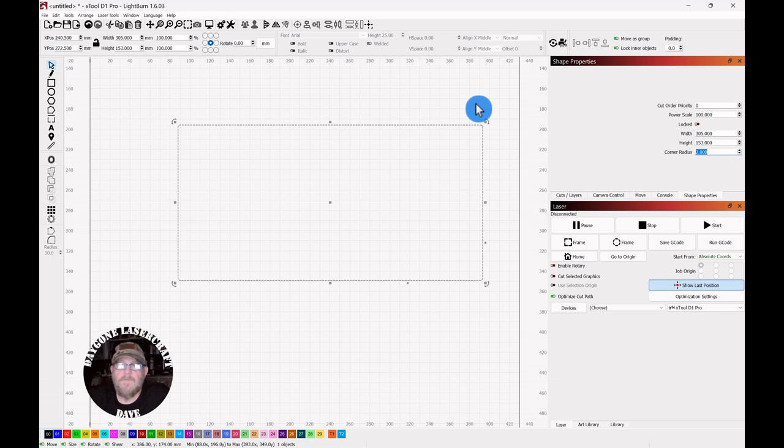So you want to select it, go over to the shape properties tab, and just radius the corners off. 2 should be fine, just keep them from being sharp because this will kind of stick out on the bottom a little bit. If you don't have that shape properties tab, you can go up to window, down to shape properties, and make sure it's selected.

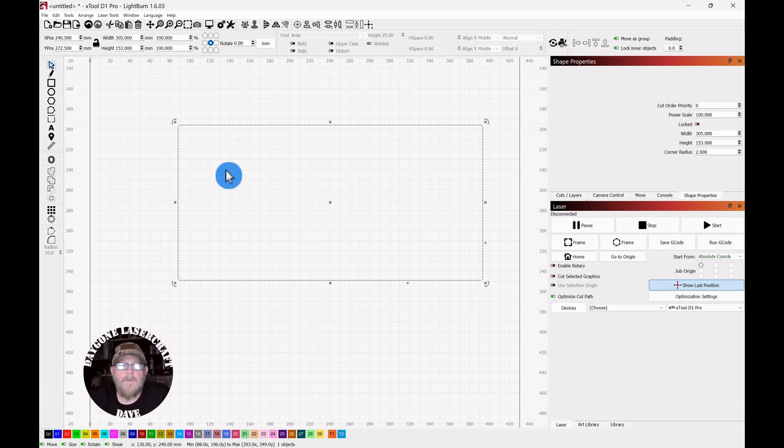So select your rectangle, and then we want to go over to the offset tool, and we're going to offset this inward, bevel, and 2. That's going to allow us to set up a tool so we can line up our slots.

So remember, you can use your mouse wheel to move in and out, and you can hold it down and move your entire canvas around. I do that a lot so I can try to keep the work out from behind my face.

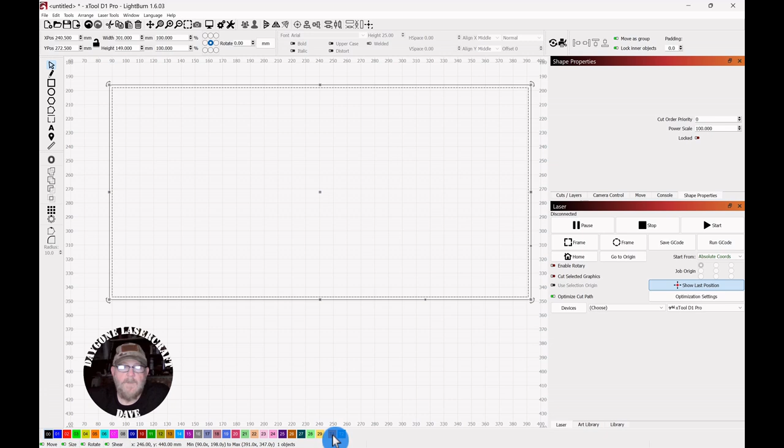So you want to scroll in, and you want to select that inner offset, and then go down to the bottom and turn that into a tool. Now don't group these together.

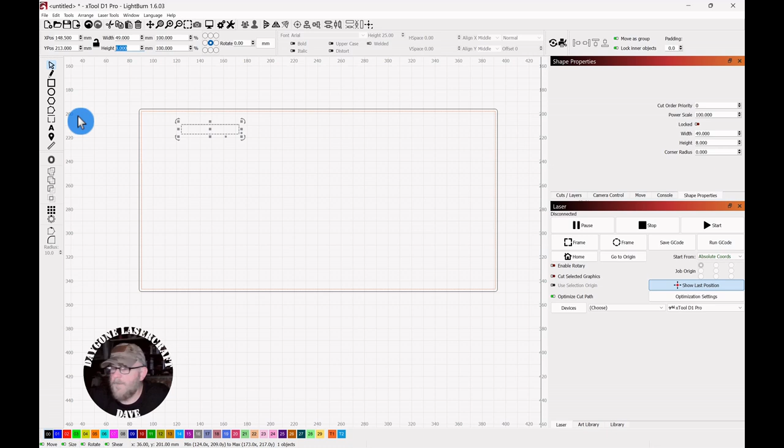And then we can grab a square, just drag out a rectangle and drop it, turn it into a cut, and we're going to set up our slots. So we're using 5mm Luan plywood, and to adjust for kerf a little bit, we'll make this height 4.8. And then the length, we just make that 50.

That should work fine. Then you want to select it, Control D to duplicate, and just pull one out of the way. It's always a good idea when you make little things to just hold one aside, so you don't have to do it again. I usually forget - if you look back at my other videos, I'll forget and have to go back and do it anyway. Okay, so we're just going to grab the edge.

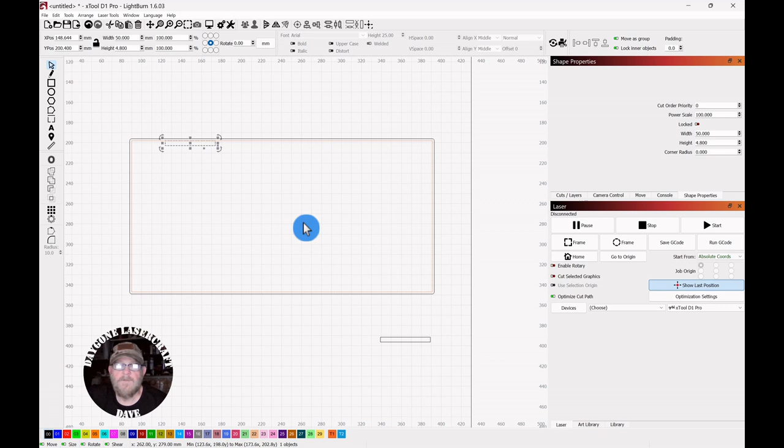We're going to grab the edge of this. And I believe with version 1.6 of LightBurn, if you hold Alt, it makes the snap a little stickier, so it'll snap from further away, which is a good thing. We're not measuring here, we just want 2 tabs in the front and the back, and we're going to put 1 on each side and 1 in the center for a divider.

So with that in place, Control D and pull it out. And then you can get back in, hold Alt, grab the edge of it, and then snap that to the tool. And then we want to select both of these.

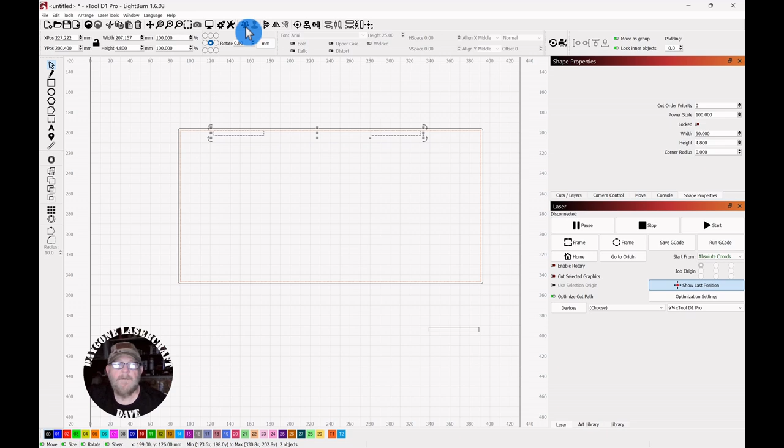And group them together. You can use group up top, or you can right click and you'll find group in this set of tools here. But with it selected, then you want to push Shift and select your base, and then go to the vertical alignment tools and click center, and it'll move those over where you need them.

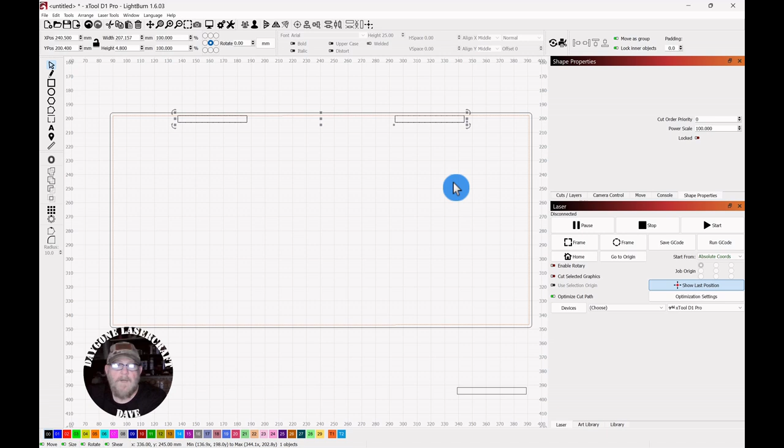Then we can select them, Control D again, use the down arrow to pull that out and take it to the bottom. And once it gets to the bottom, chances are you'll have to snap it back in place anyway - it'd be too good to be true for it just to snap where it's supposed to. But you can hold Alt and just pull it right back up where it needs to be.

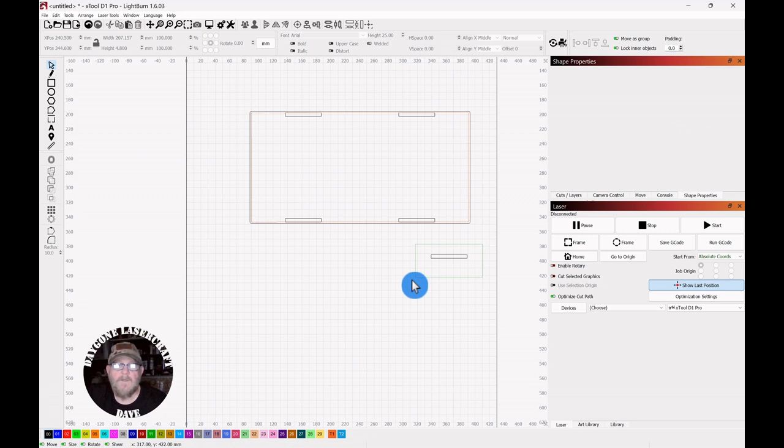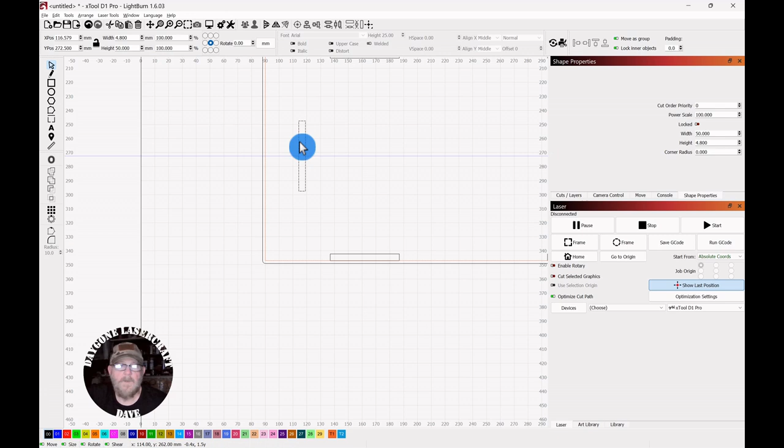All right, so now we'll get one of these. Control D, pull it out. And we're going to use the comma key to rotate counterclockwise, and we'll pull that up. Then you can pull it in and then center, or you can hold the Alt key and it'll give you a center. And as long as that line stays there, you're good to go.

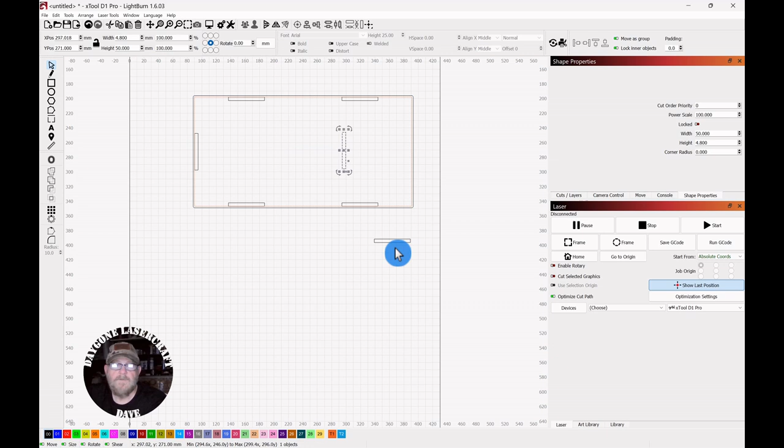Control D to pull out another one, because we need one for the center and then we need one for this end. So we'll go ahead and take this to the end, but you can use those arrow keys to move items around.

I'll try to keep this end close enough. Get on the edge, hold Alt. When you can get on the edge, just snap it right to the tool. I did not make it all the way, I make a lot of mistakes folks, but y'all hang with me, we will get this done. You can wiggle this around to make sure it gets to the center.

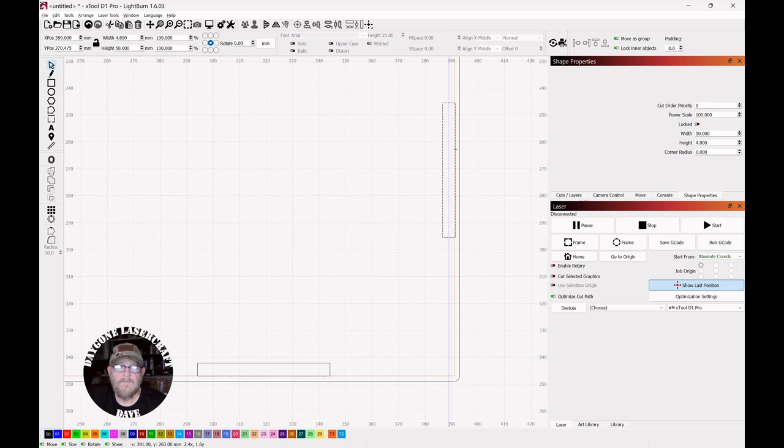Like that, that line popping up, dang, right there. And if it gets too irritating, just put it where you think you want it, then hold Shift, select, go to horizontal alignment, and click center, and it'll move it to where it needs to be.

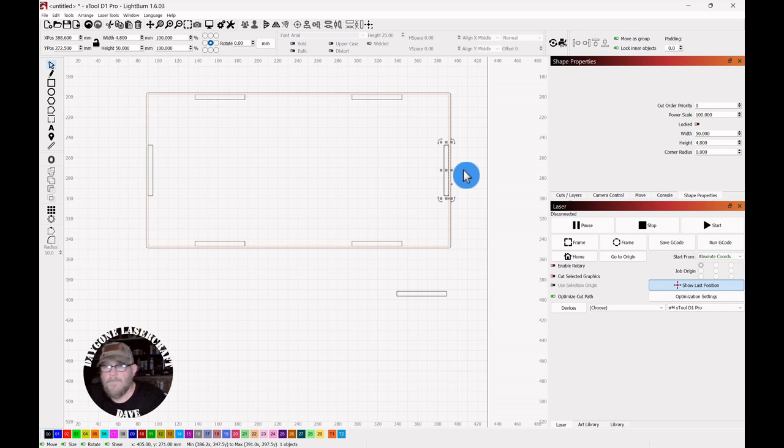Okay, so now we need one for the center. So Control D, we'll move it back out, and to save us some time, we'll go ahead and use Shift, select, and hit the bullseye, and put it right where it needs to be. Save ourselves some headaches.

Okay, so now we want to go ahead and lay out the back piece first. To get the width of the back piece, let me get in closer. It's this back line, this tool line is what we want, and then our end pieces will sit inside. We're not worried about it being real tight because we're not purposely putting tabs in the front or back, because we didn't want them to show. That's why they're on the bottom. The front will look smooth when we finish this off.

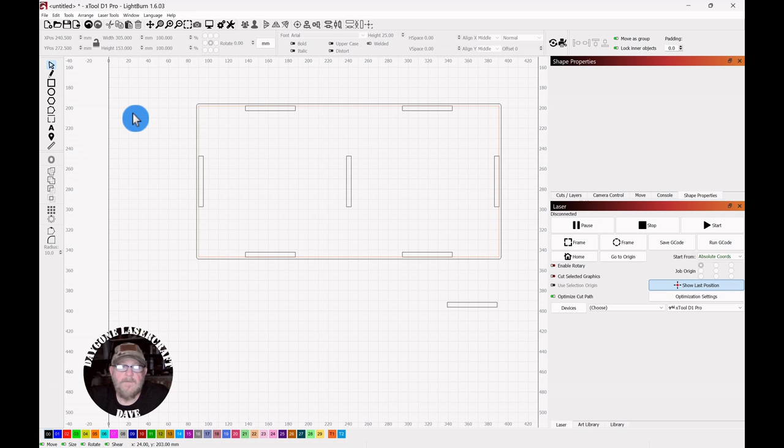So to get that length, you can click your ruler and you'll get this pop-up. With this line, you just scroll your mouse over the area that you want to know, and it'll give you the distance, which is 300.9 millimeters. So that is the width we need.

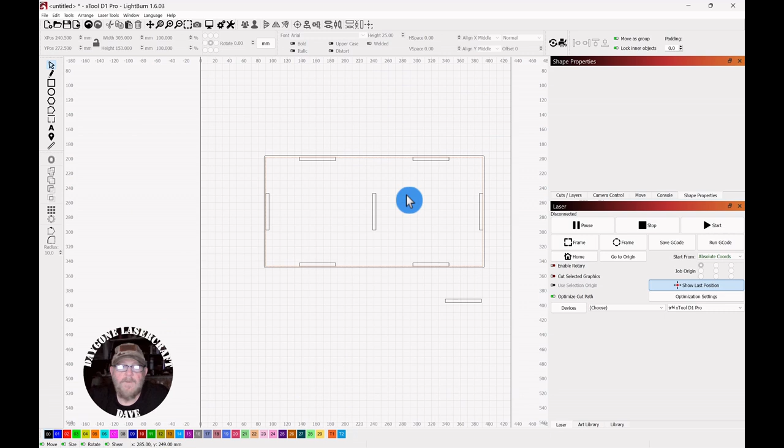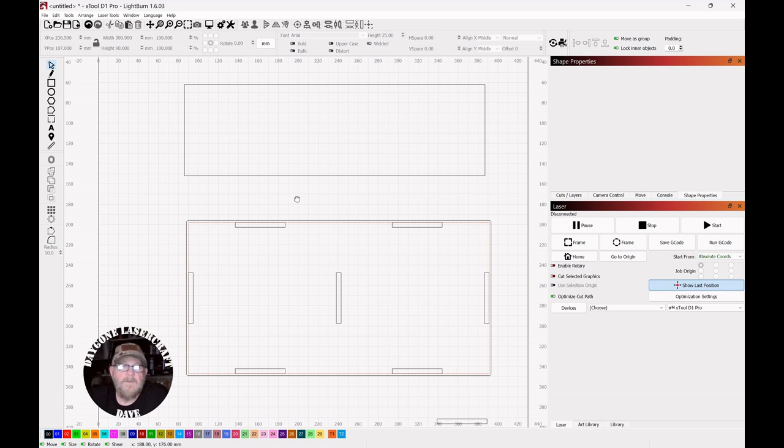So we can grab a square, just drag out a rectangle and drop it. Click your selector tool, go to width, and set it to 300.9. And that's what we got. To check it, we can select it and just bring it down and see if that is right, and it is.

Okay, so now for the height, yeah, I guess it just magically went to 90, but 90 is what we need because that's about 3.5 inches.

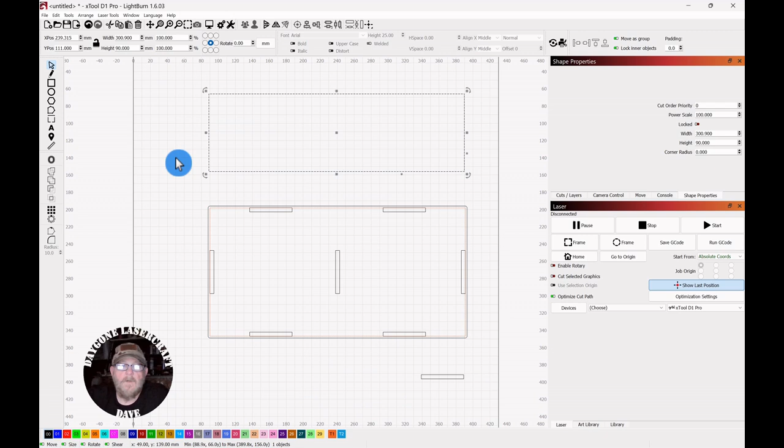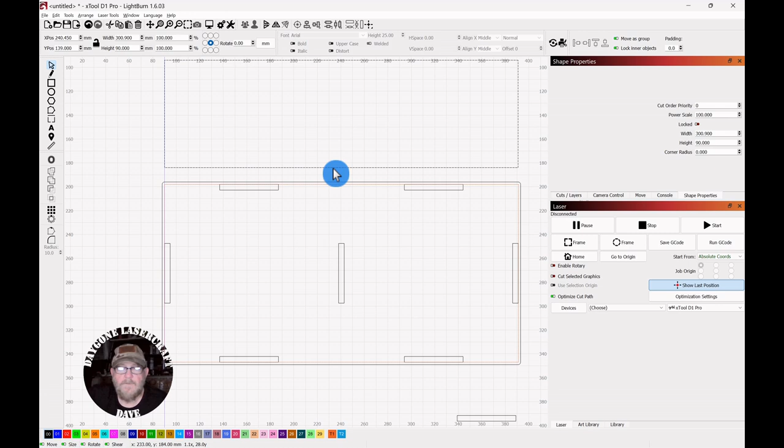So now what we're going to do is line this up with the Alt key, and then we're going to set those tabs where they need to be. Make sure you line up with that inner piece, you can see those lines there. And then release, and then you can select these.

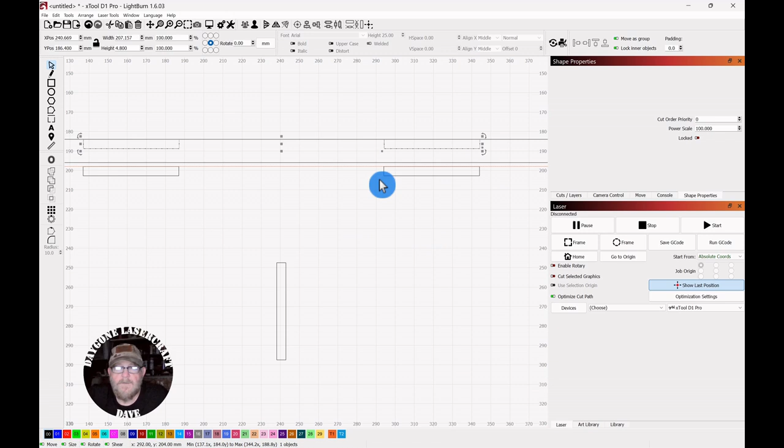So don't group any of this together at this point. Then you can Control D, use the up arrow, and then you can pull those out. You'll have to grab them and get on the edge and snap it to the edge, but that's okay. The main thing is you want to be lined up with these slots here, and I believe we are.

So you can just select everything, and then you can pull it back down and make sure that it's lined up, and they are.

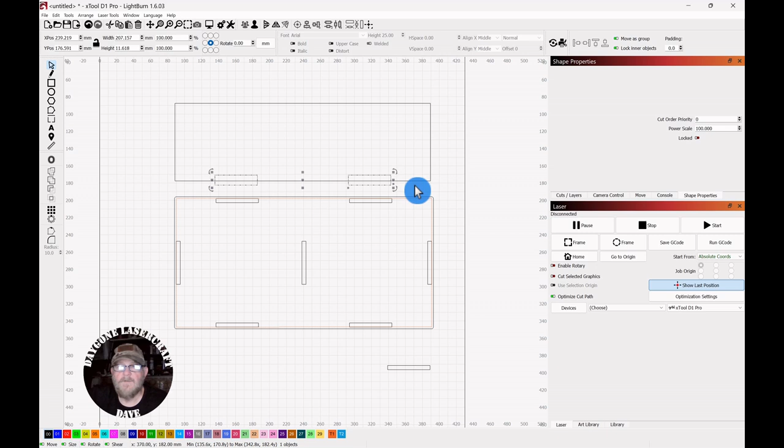And then you can select them, select those two, and just pull them up inside a little bit. That way you can be sure that they're going to weld, because sometimes you'll weld if it's not snapped good. You'll weld, but it'll leave a crack, and you don't want that to happen.

All right, so we're going to select all of this together. We're going to go to the modifier tools and click weld. And there we go, so that will be the back. Let me move this tab out of the way.

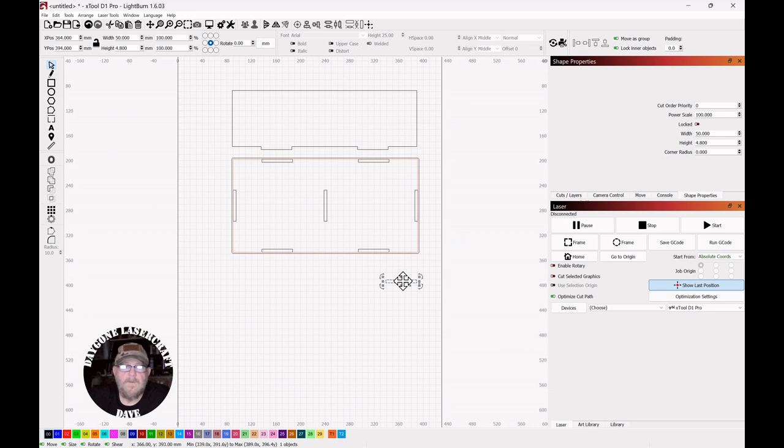The front will be a little different, quite a bit different, because we're going to write coffee bar on it, but we got to prep that first. So we're going to duplicate this, and we're going to pull it out, maybe. I might have missed my chance, I click too fast sometime.

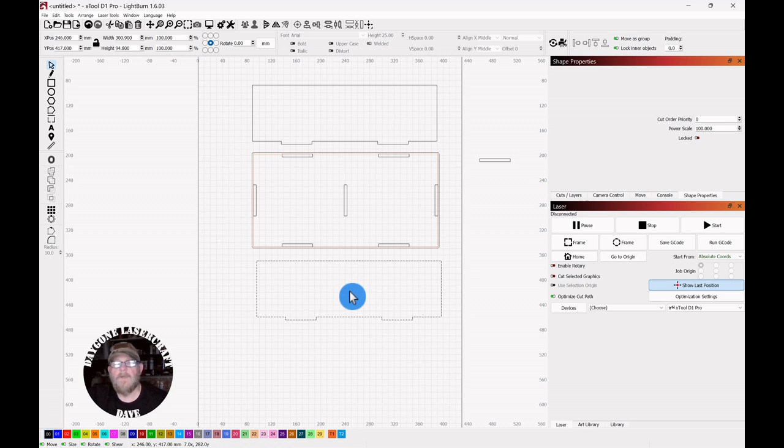Okay, so that's our front. But we want to make room to write coffee bar in it with a font that's free, and I'll leave a link for that font. It's Arco Typography.

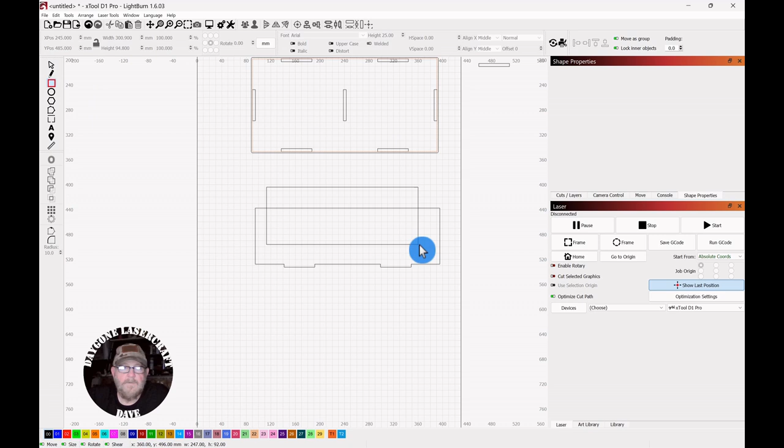So we're going to grab a square, and we're just going to draw out a rectangle and drop it, and then we're just going to cut this out of it.

We're not really measuring, but we want about 10 millimeters left around it. So with it selected, you can shift and select that outside, then click Align Center, and then get your ruler, and I just want to see how long.

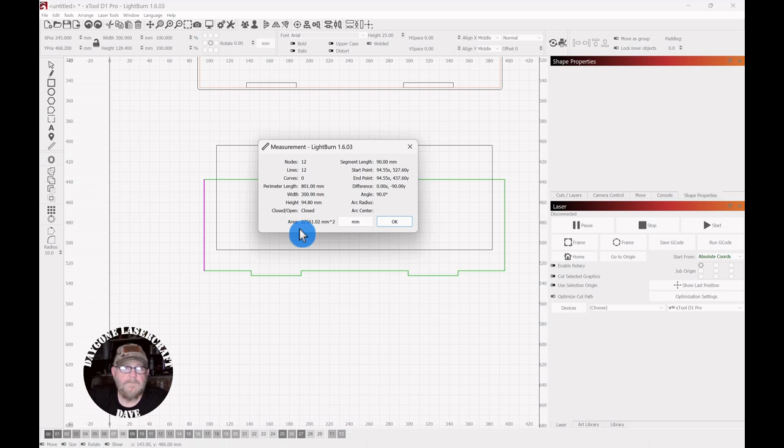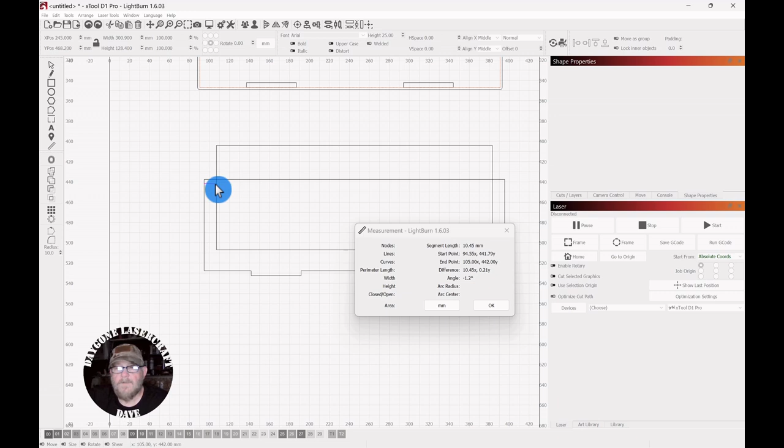If it's an established line, you can touch it and it'll give you the distance. If it's not, like this area right here, you can left click and drag a line out, and that tells us it's 10.45 millimeters, which is fine. On the bottom, it's a little more, but that's probably okay too.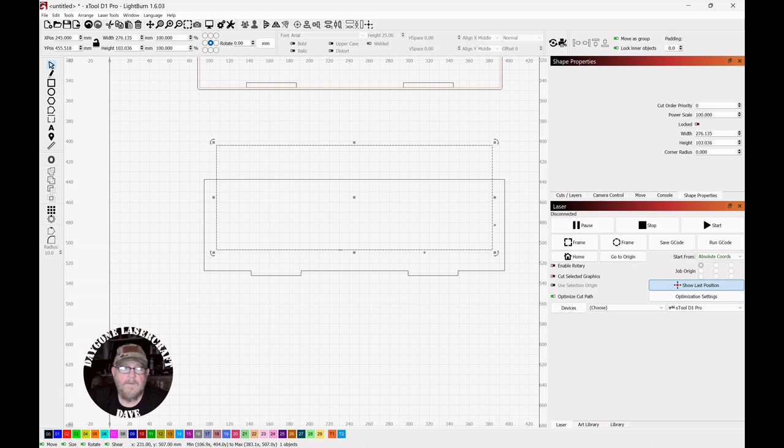That is about 20, but you could click OK, click that, and then hit your down arrow and bump it down a little bit. But then we're going to select everything.

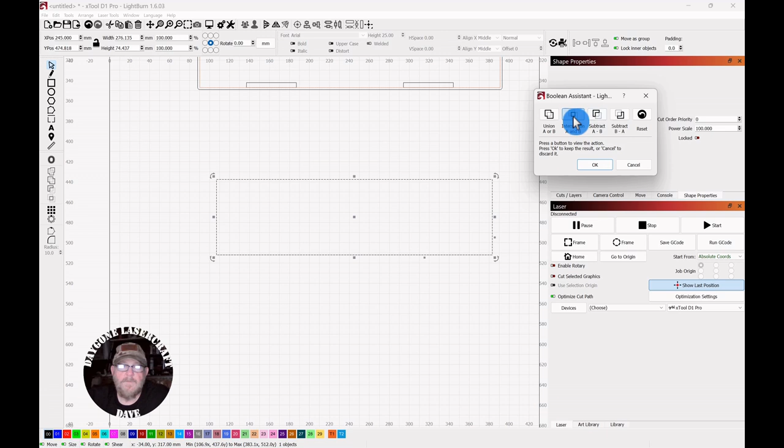We're going to go up to Tools, down to the Boolean Assistant, and then you can subtract this out. You have other options here when you do it, but we don't want them, but at least you know they exist. So click Subtract A from B, click OK, and now we have what we need to work with that.

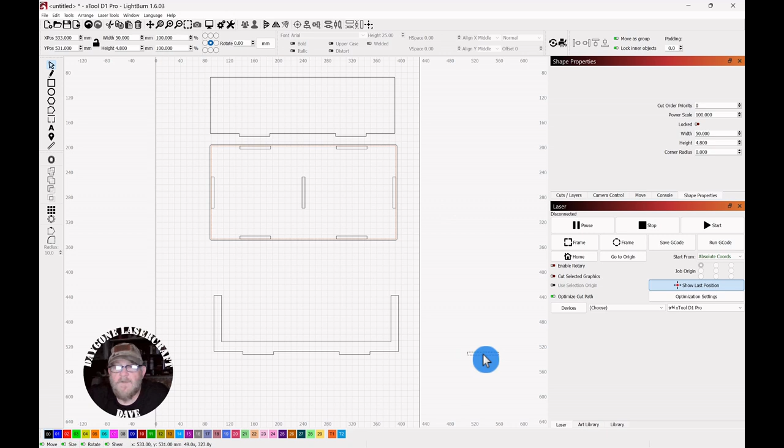But we can go ahead and do our end pieces and this center piece. Now, to do that, you have to keep moving stuff out of the way, but that's a small price to pay to make sure you have it when you need it.

So we have our slot that is 4.8, but we know that our wood we're using is 5 millimeter. We want the centerpiece, these centerpieces, to set inside, because when you're looking at it from the front, you don't want to see the edge of the wood.

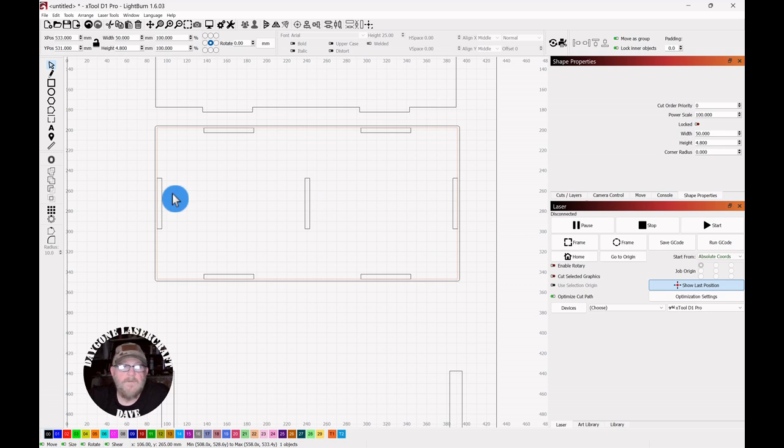So like I said, it doesn't matter if it's a little bit loose, because this tab's going to hold it into place. But to get that distance, we're going to grab our ruler, and we're going to go to this tool. So that's the length you would need if you were cutting cornered edges, which we're not.

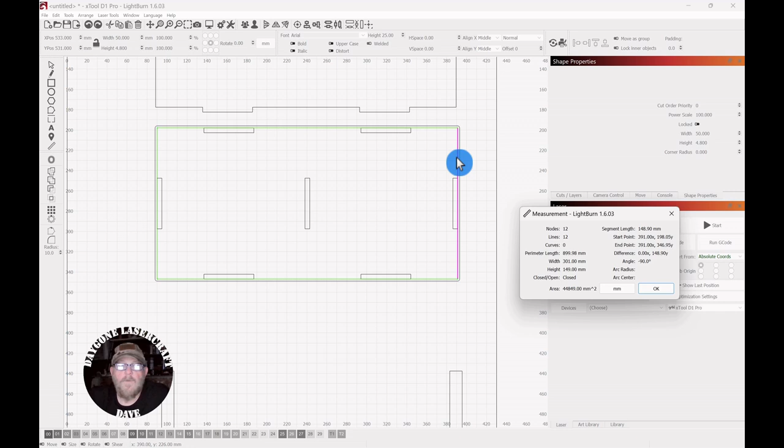So what we've got to do is subtract 10 millimeters from that. We have 148.9, so we're going to go 138.9, and that'll give us what we need.

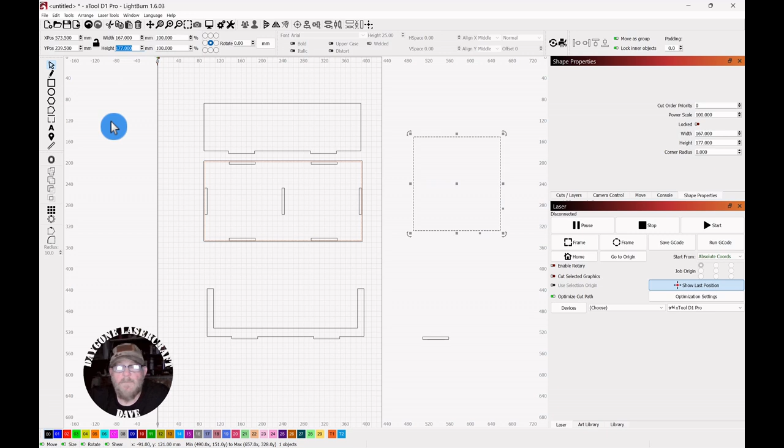All right, so now we're going to grab a square, and we're just going to draw out a rectangle, drop it. We're going to make it a height, which will be the width due to positioning, of 138.9. And then the width, which due to positioning is the height, will be 90, which again is about 3.5 inches.

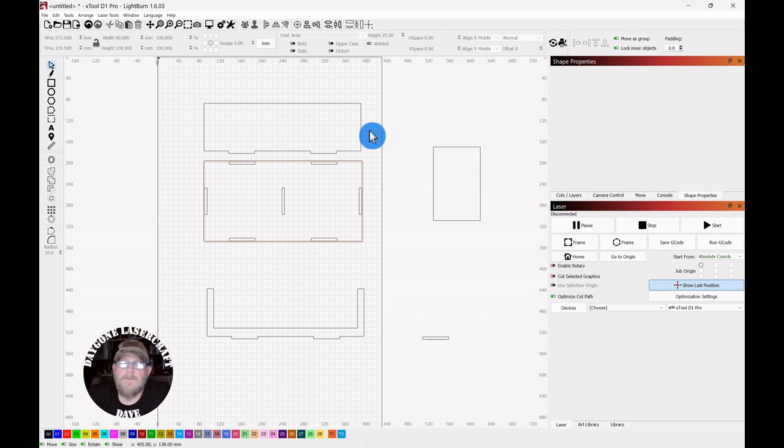And then we're going to do the same thing to get these tabs on here. We're just going to pull it close, and we're going to use that Alt, and you can see that in this case, you have to use the center line if it'll pop back up.

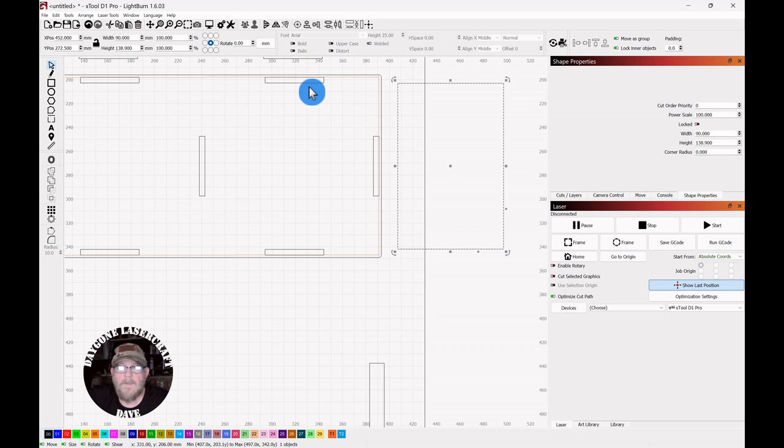Right there, you have to use that center line, then you can let go because you've got the extra space on the outside. We could have drawn a line on the inside to gauge off of, but adjusting for the curve and it being 4.8, it would have still made these panels too tight to fit.

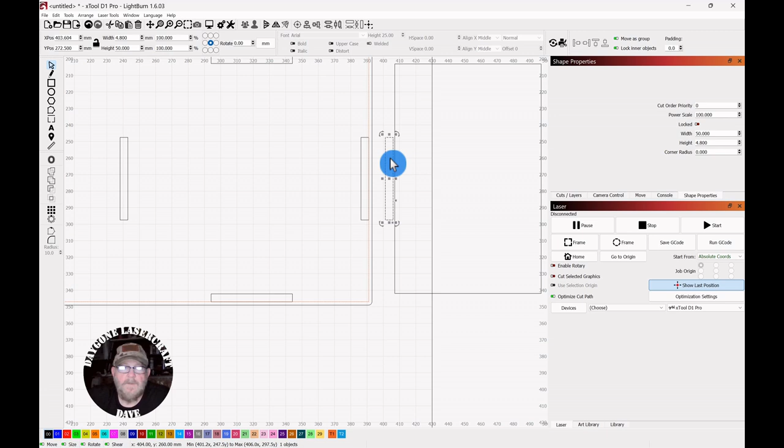All right, so now we can select the slot, Control D to duplicate, and then use the right arrow to pull one out. And then you can get in close and click with your left key and then hold Alt to make sure you stayed center.

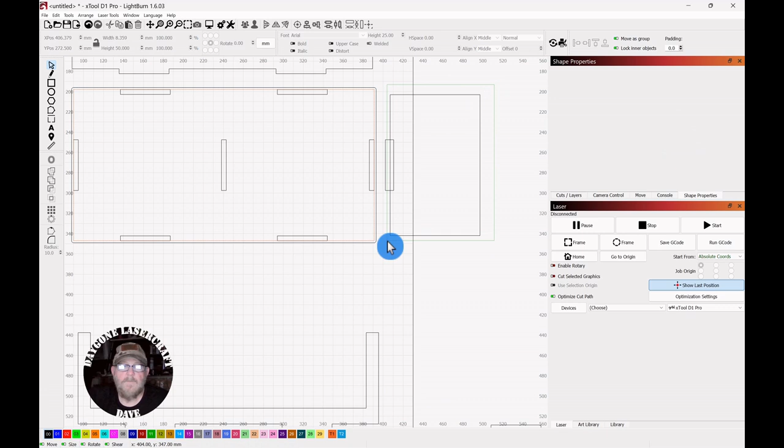Then release both, and then you can grab the top edge and drag it inside. Then you can select both and weld it together. Sorry if I'm talking too much, folks, but being a newbie myself, I have to talk so I can hear myself saying what to do.

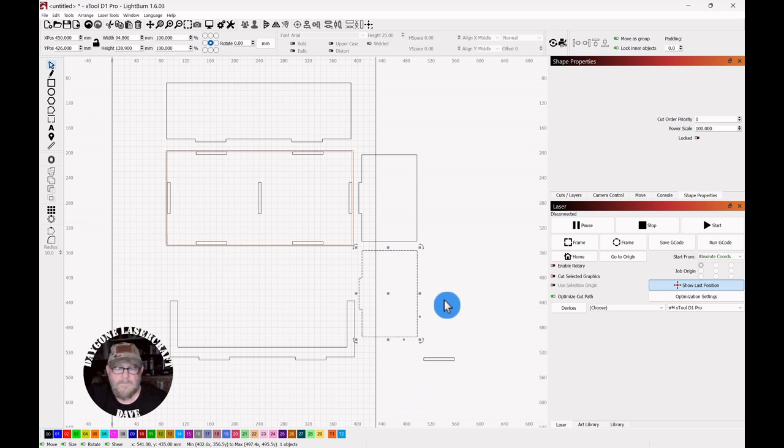All right, so now we can just duplicate this a couple of times, and we will have the three panels that we need. We'll have our three panels, and now all we need to do is write coffee bar. And we didn't need that after all, but we had it.

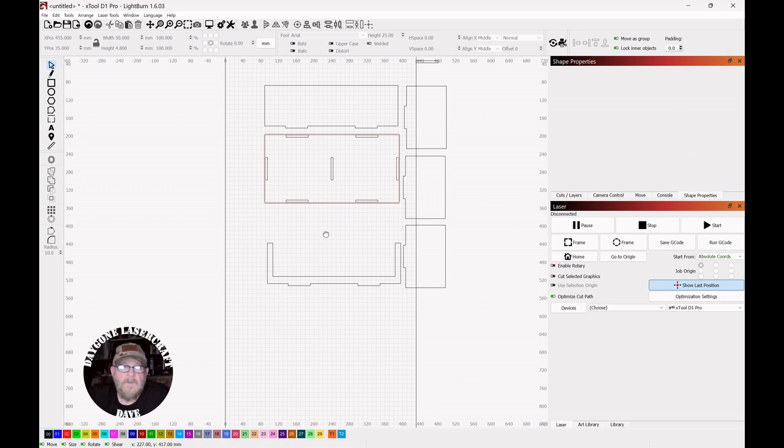So like I said, we're going to use a font called Arco Typography, and it comes from dafont.com, and it's 100% free. I'll leave a link so you can go out and get that, and take a look. There's literally hundreds of free fonts that you can use.

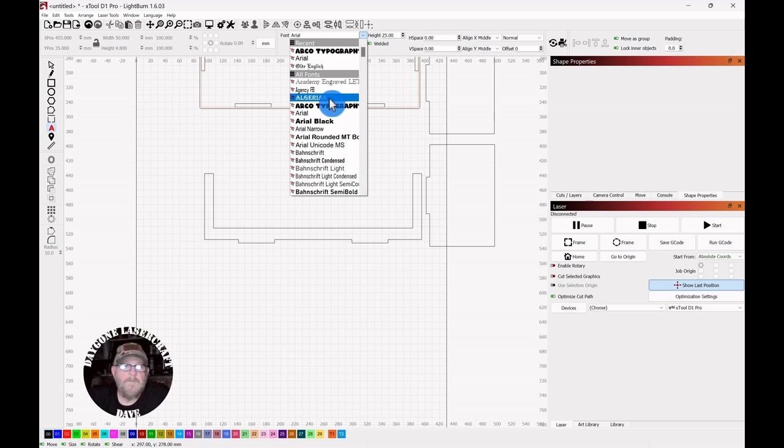All right, so we're going to get the text tool and go up top. Now, once you install this font, it'll be made available immediately for you to use in Lightburn.

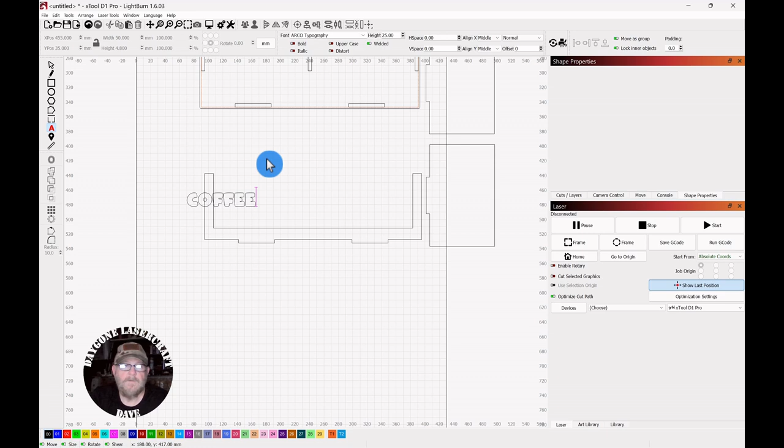Okay, so this particular font is all caps, but it looks good. Coffee space bar is what we're putting, and then click the selector tool, and you can just drag this out to fit.

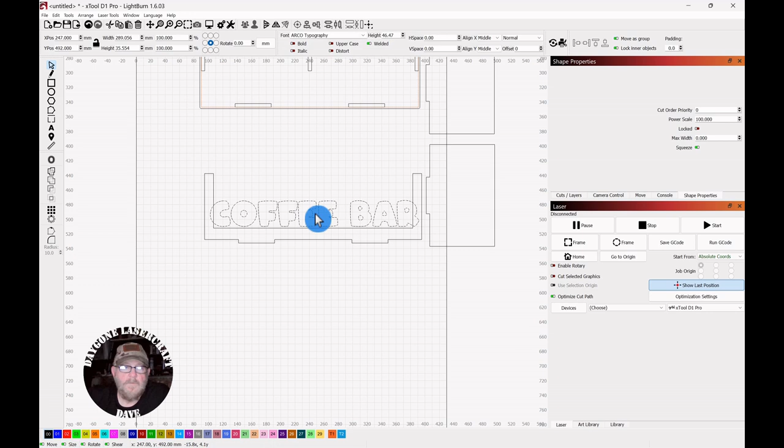And then we're going to drag it up, and we're going to put a cap on the top of it. So just work with it, and you want it to just barely touch the bottom and the two edges.

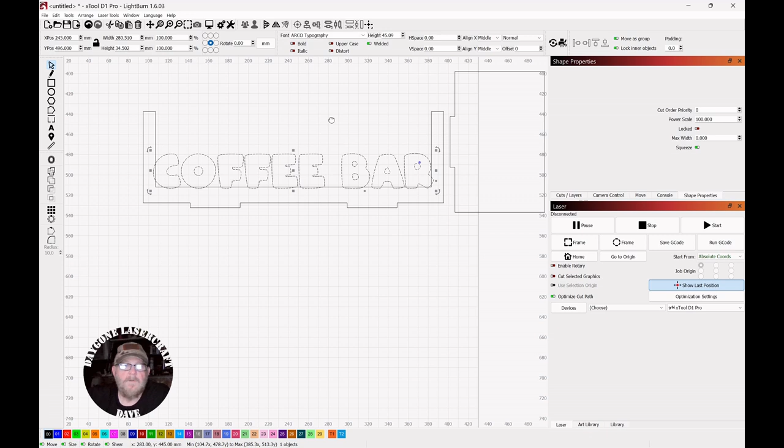So just work with it until you get it something like that, and then you can grab the top and stretch it up.

And then you can grab a square and just drag one out, go across the top, and probably want to make sure that this is at least 8 or 10 millimeters, maybe 6 or 7 would work fine.

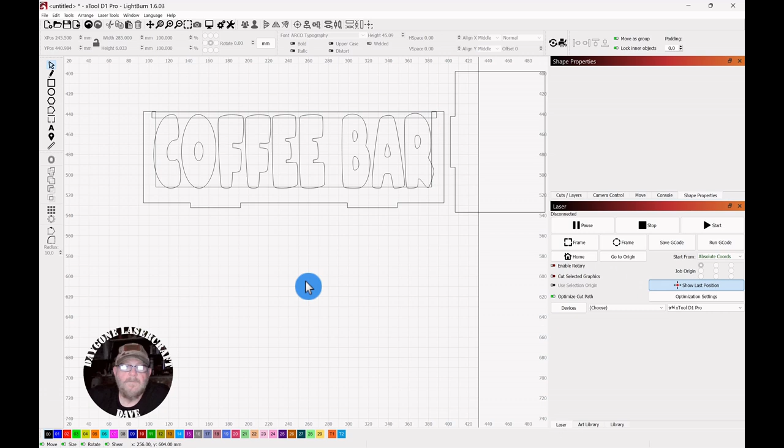Again, we can do that by grabbing the ruler, and we can check on the edge, and that is 6 millimeters, so that's fine. But whatever you like, you do that.

So now, just make sure it doesn't exceed the top. To do that, you can get in close and grab the top edge of this one, hold Alt, and it'll give you that little blue or purple line, and you'll know you didn't go past.

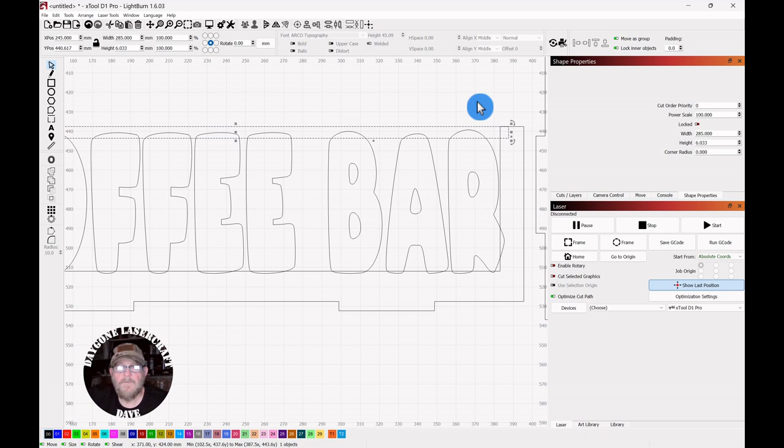Now we can select everything and click Weld.

And once you weld letters like this, if there's a piece that looks weird or you didn't want, then you can select it, like this little piece down here at the bottom, right here.

You could select it, ungroup it, click away, and then select that piece you don't want and click delete.

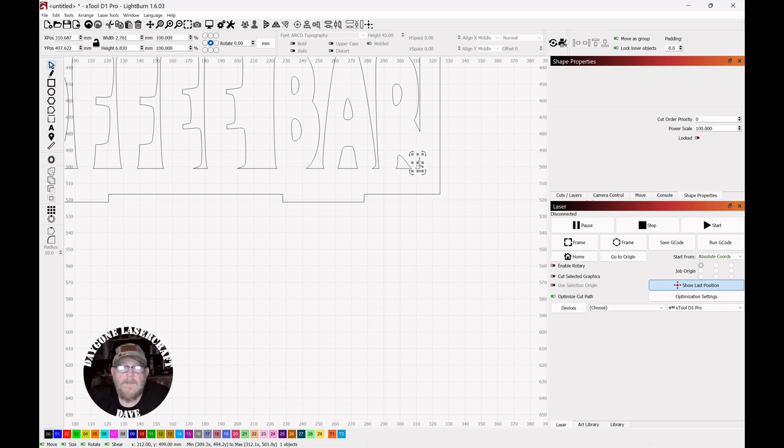And then go back and group it all back together, because if you move it, you're going to lose the inner portion of some of the letters.

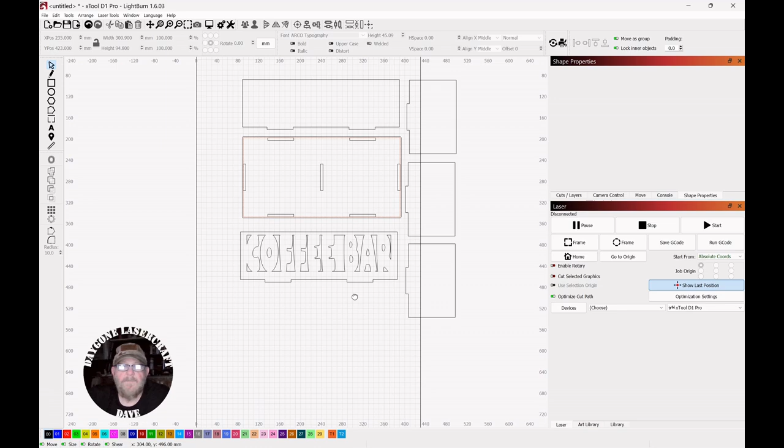So I think we're ready to go to the laser. Give me a minute to set up, and we'll cut this out and see what it looks like. I'll be right back, folks.

Okay folks, we are set up and ready to cut. It's going to take 2 cuts, so I'll just change them out midstream and keep going.

Like I said, this is 5mm Luan hardwood plywood. I got it at my local hardware, a big box store, but it's local. I'll leave a link in the description so you can pick some up if you like. It's a really good project wood, I think you'll enjoy using it.

Okay, let's send the code on over and get this cut out, see what it looks like.

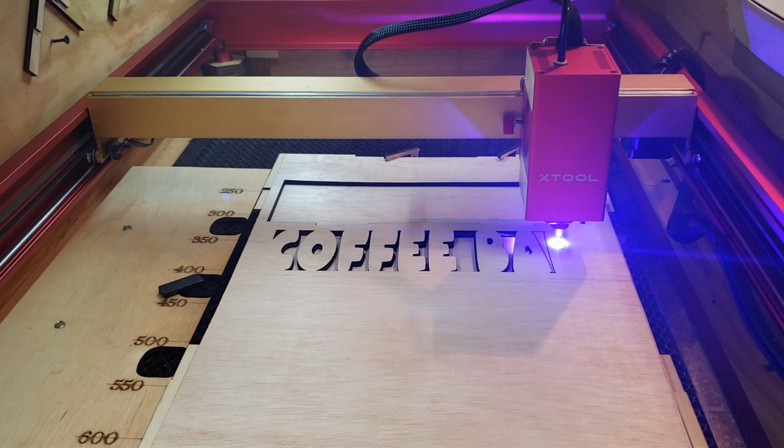Okay folks, let me put this together and we'll get a closer look at it. So here's our finished coffee bar tray. I think it turned out really nice, and it's pretty solid, even though we put tabs just on the bottom. I don't think it's going to have any trouble holding up a few cups and some sugar.